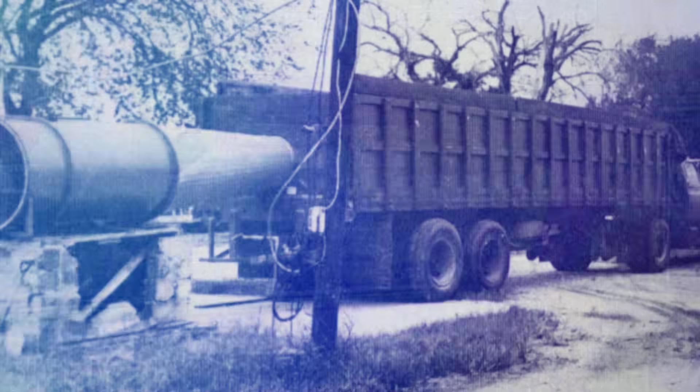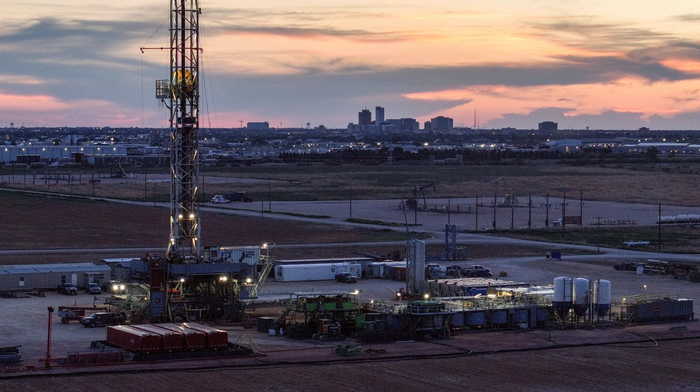You are looking at a farm that has not paid a natural gas bill since 1974, 50 years. The energy heating that farmhouse, cooking that family's food, heating their water, and running their grain dryer comes from a covered concrete tank beside the barn. Inside that tank, the manure from 40 dairy cows is producing methane gas continuously, the same methane that your natural gas company pipes to your house from a well in Texas or Oklahoma, chemically identical, produced for free by animals this farm was already feeding.

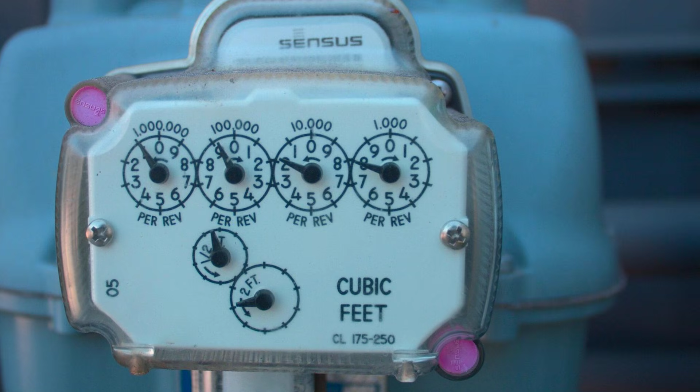The digester that makes this possible cost $1,200 to build in 1974. It has produced energy every single day since, 50 years. At current natural gas prices, the energy it has produced over that period has a retail value of approximately $187,000 against a construction cost of $1,200. Now here is what should make you set down whatever you are holding.

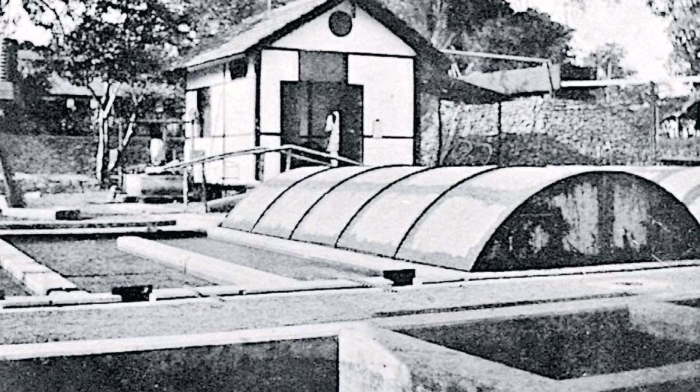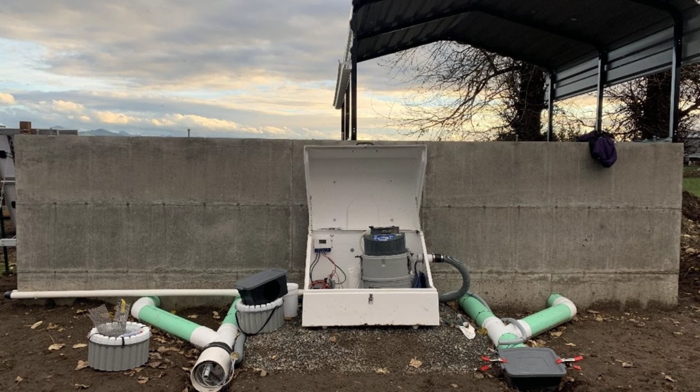In 1974, farm methane digesters were a growing movement across rural America. The energy crisis had made farmers acutely aware of their fuel dependency. University extension programs in Iowa, Wisconsin, and Minnesota were publishing construction guides. The USDA had funded research programs at 3 land-grant universities documenting digester performance across working farms. By 1980, that movement was effectively dead.

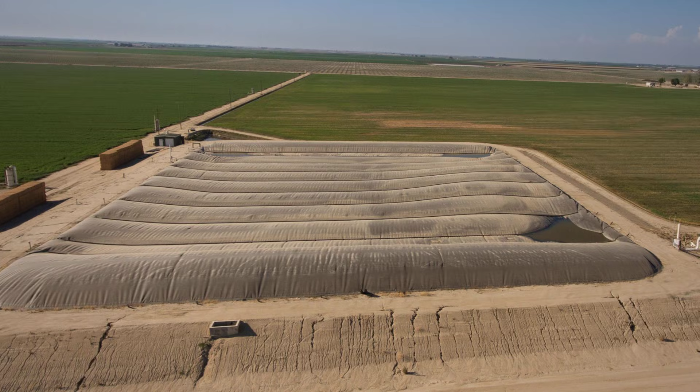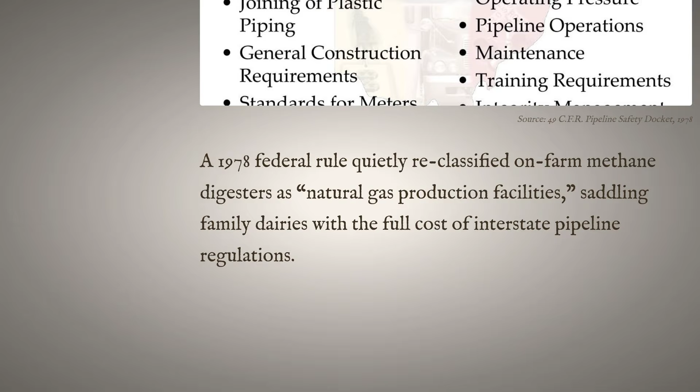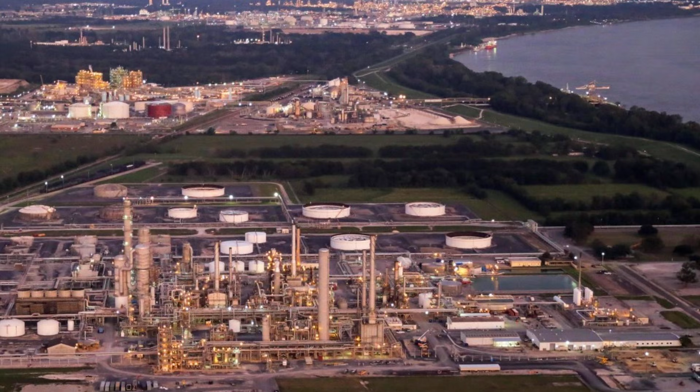Not because the digesters stopped working, but because the American Gas Association, the trade body representing every natural gas distribution company in the United States, spent $2.8 million between 1976 and 1979 on a regulatory campaign that resulted in farm methane digesters being classified as natural gas production facilities under federal pipeline safety regulations. That classification required farm digesters to meet the same construction, inspection, and operational standards as commercial natural gas production operations. Compliance cost between $40,000 and $120,000 per installation for a system that cost $1,200 to build.

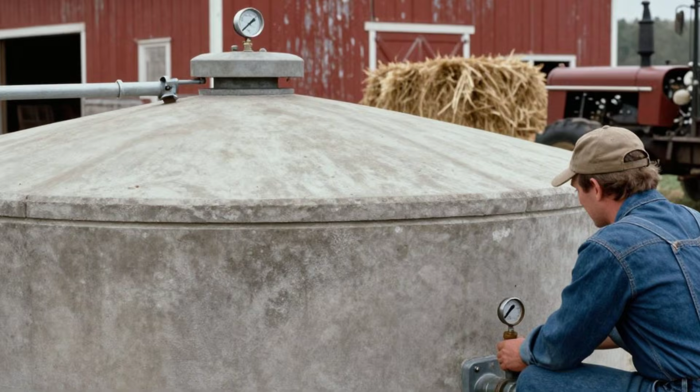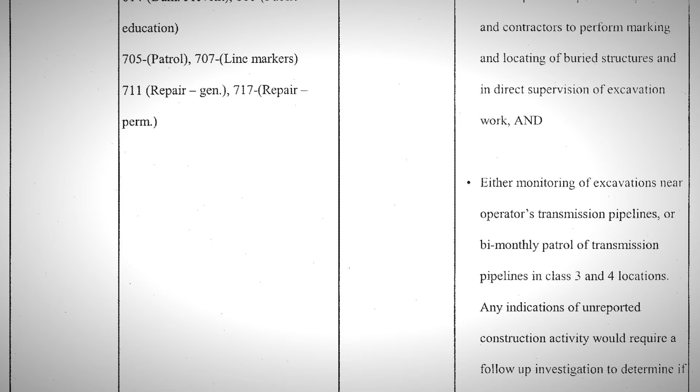The regulatory documents exist, the lobbying records exist, and the man who built his digester in 1974 before the classification took effect has been running it ever since because the regulation grandfathered existing installations. He has never stopped. Stay until the end of this video, because that man is still running his digester in Fillmore County, Minnesota. And the legal pathway that allows you to build one today without triggering the 1978 classification has been sitting in the federal code since a 1986 amendment that the American Gas Association fought and lost. By the time this is over, you will know exactly how a farm methane digester works, exactly who classified it as illegal, and exactly what it would cost to build one before next winter.

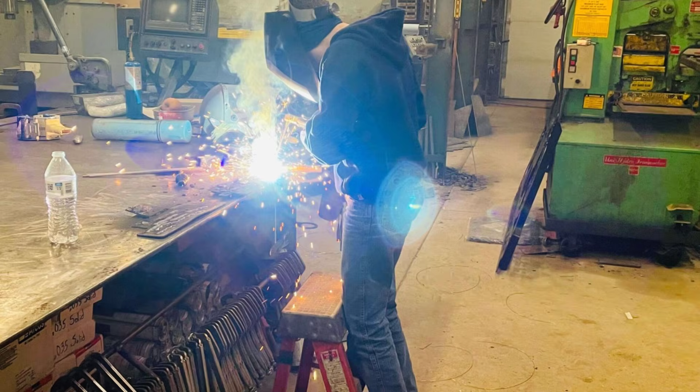I drove to Fillmore County on a Wednesday morning in January. The temperature was 4 degrees. The farmhouse I was looking for had lights on in every window. The barn beside it was lit. The water in the stock tank was not frozen. I parked and walked to the barn. The man who met me was named Harold Fensky. He was 78 years old, a dairy farmer. He was the kind of man who built things himself because he trusted his own hands more than he trusted anyone else's invoice. Harold walked me directly to the digester.

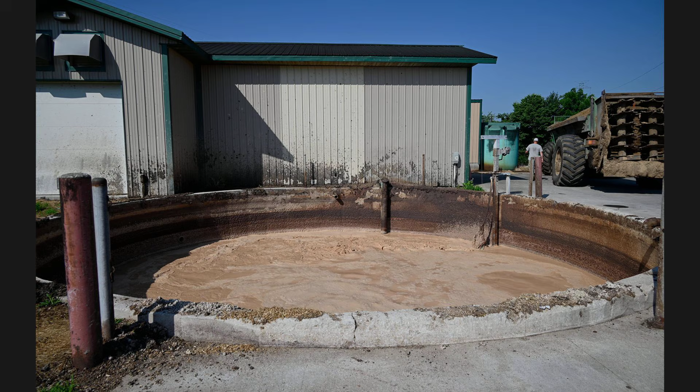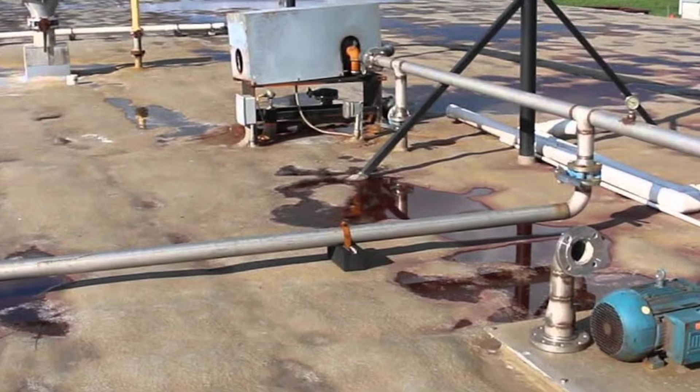It was a covered concrete tank approximately 20 feet long, 10 feet wide, and 8 feet deep, insulated with 2 inches of rigid foam on the exterior walls. A flexible gas collection cover sat on top, 2 pipes, 1 inlet from the barn manure scraper, and 1 outlet carrying gas to the farmhouse and barn. I pressed my hand against the cover. It was warm. The biological process inside was generating its own heat, even in 4-degree January air.

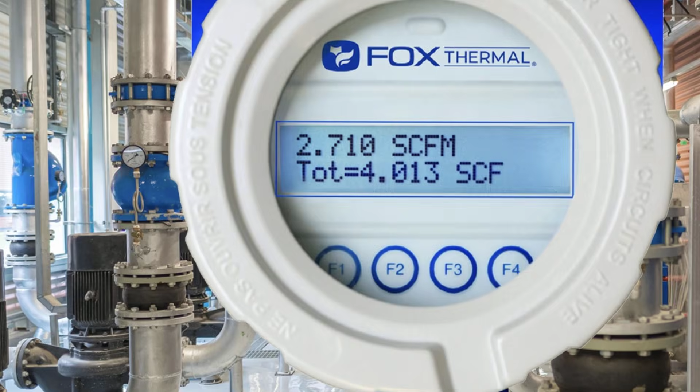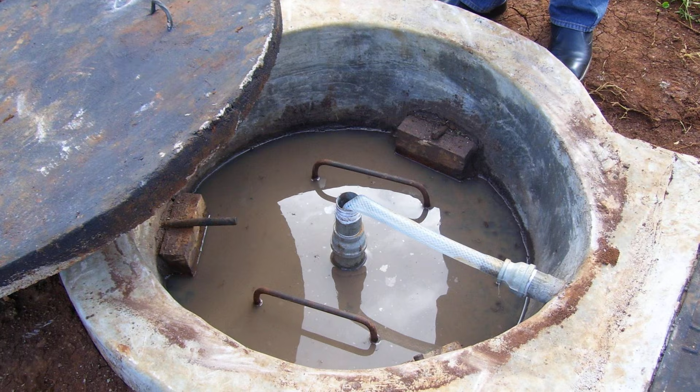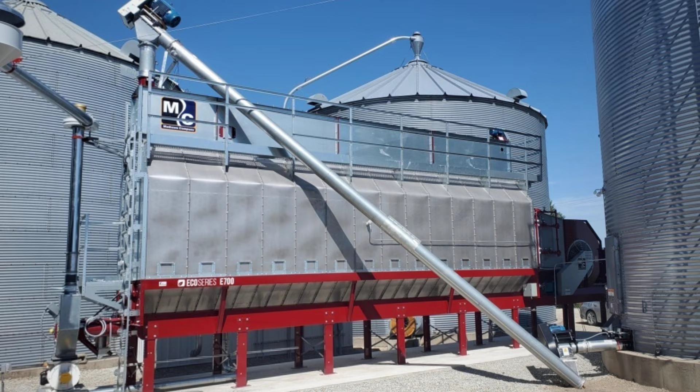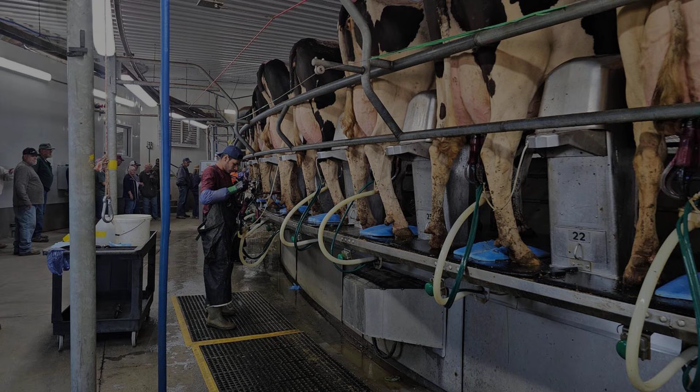Harold pointed to a pressure gauge mounted to the outlet pipe. It read 8 inches of water column, the standard low-pressure measurement for farm biogas systems. He said she is running good and that she always runs good in winter as long as he keeps the inlet warm. I asked what the digester powered. He said house heat, cook stove, water heater, grain dryer in fall, shop heater in winter. I asked what his natural gas bill was. He said, I do not have one. I asked what his electricity bill was. He said, about $40 a month, just the lights and the milking equipment. Everything that used to run on gas runs on the digester.

I stood beside that tank in 4-degree January air, and I thought about the $340 natural gas bill I had seen on a farm 2 counties over that morning. I thought, this man has not written that check in 50 years. Then I asked Harold why more farmers were not running one. He said, because they made it illegal to build. I asked who did. He said the gas company. Look it up. I looked it up.

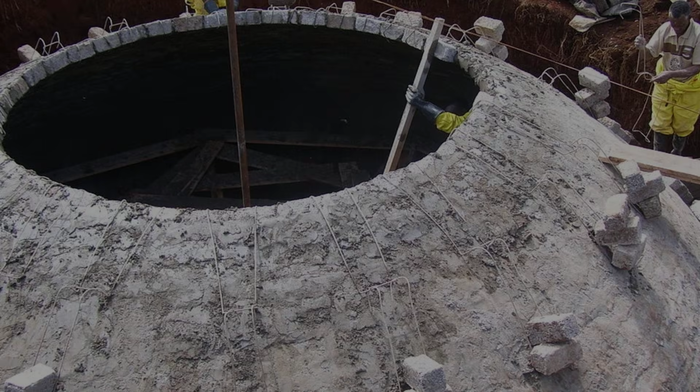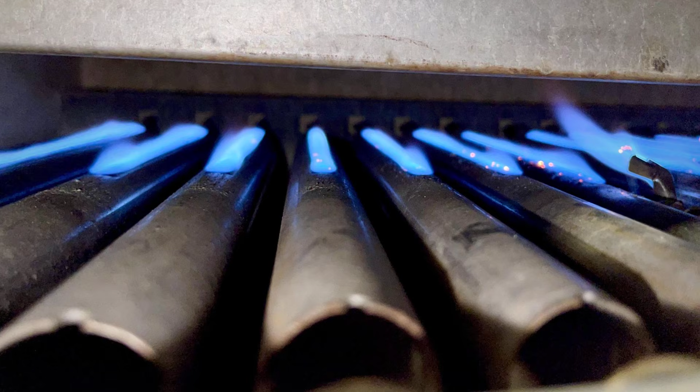Here is what is actually happening inside Harold's concrete tank. Anaerobic digestion is a biological process in which microorganisms break down organic material in the absence of oxygen. The primary output of that breakdown is biogas, a mixture of 60% methane and 40% carbon dioxide with trace amounts of other gases. The methane component is chemically identical to the natural gas delivered by pipeline to your home. It burns at the same temperature. It produces the same heat output. It runs the same appliances. The feedstock, dairy cow manure, is the most productive biogas substrate in common agricultural use.

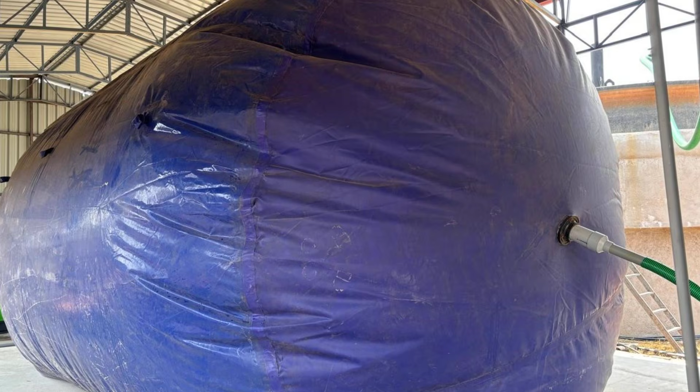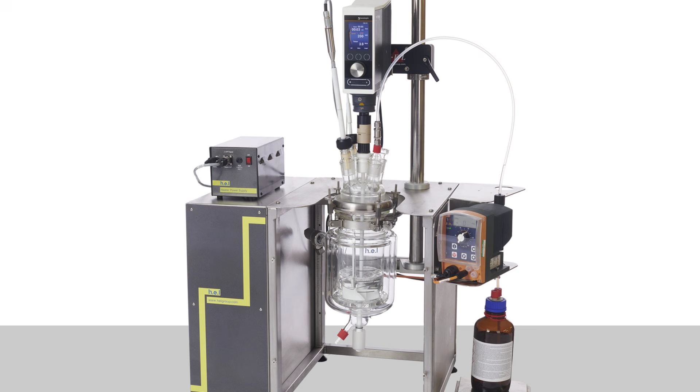A single dairy cow produces approximately 120 pounds of manure per day. That manure contains sufficient organic material to produce between 28 and 40 cubic feet of biogas daily. Harold runs 40 cows. His daily biogas production is between 1,120 and 1,600 cubic feet. The energy content of biogas at 60% methane is approximately 600 BTU per cubic foot. Harold's daily energy production is between 672,000 and 960,000 BTU.

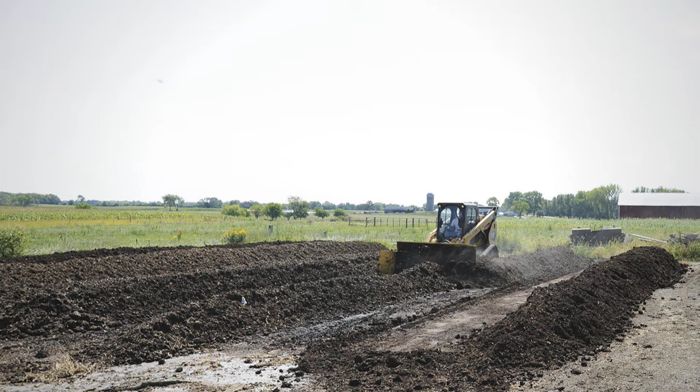The average American farmhouse requires approximately 400,000 to 600,000 BTU per day for heating, cooking, and hot water in a cold climate winter month. Harold's 40 cows produce more energy than his farm and house require every day from waste that was already being produced.

The Iowa State University Extension published a farm biogas feasibility study in 1975, the year after Harold built his digester, documenting the energy production potential of dairy, swine, and poultry operations across the Midwest. Their findings confirmed that a dairy operation of 30 or more cows could produce sufficient biogas to meet all thermal energy needs of the farm and residents.

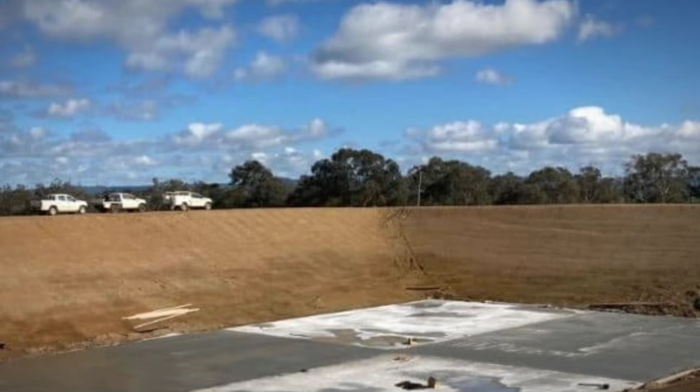30 cows. The study documented construction costs for a basic covered lagoon digester at between $800 and $1,500 in 1975 dollars. That study was distributed to 4,200 farmers through the Iowa State Extension Network in 1975. It was withdrawn from active distribution in 1979. The same year, the American Gas Association's regulatory campaign reached its conclusion.

The farm methane digester did not disappear from American agriculture because it stopped producing energy. It disappeared because the American Gas Association, AGA, executed a regulatory campaign so precisely targeted that it made the construction of a new farm digester economically impossible without ever passing a single law through Congress. The campaign is documented in the Federal Register.

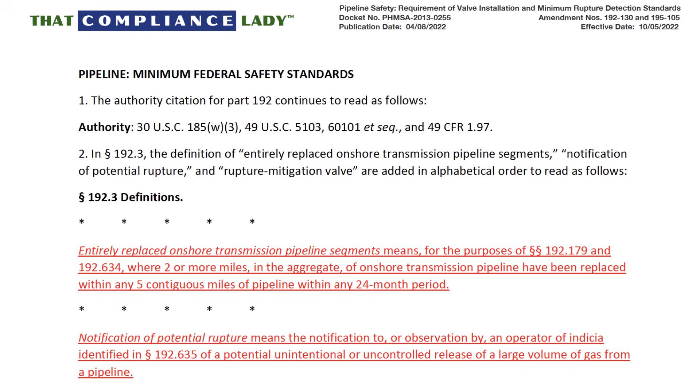In 1976, the American Gas Association, AGA, whose members included Columbia Gas, Consolidated Natural Gas, Pacific Gas and Electric, and Southern Natural Gas, filed a formal petition with the Department of Transportation's Office of Pipeline Safety, requesting that farm biogas production systems be classified as natural gas facilities under 49 CFR Part 192, the Federal Pipeline Safety Regulations.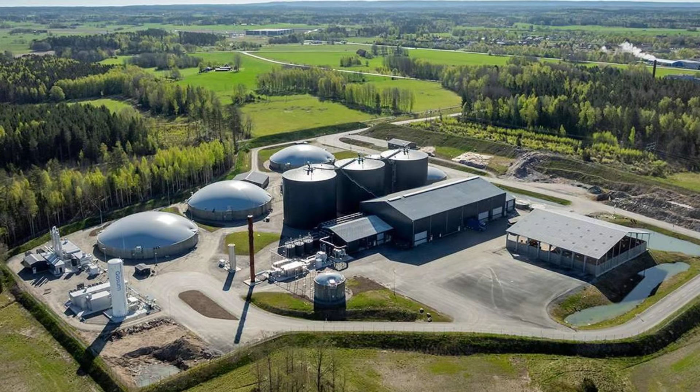The petition argued that farm biogas systems produced a gas chemically similar to natural gas and therefore posed similar safety risks, requiring equivalent regulatory oversight. That safety argument was not entirely without merit in the context of large commercial biogas operations. It had no merit whatsoever in the context of a covered concrete tank on a dairy farm producing low-pressure gas for on-site use. The AGA knew this.

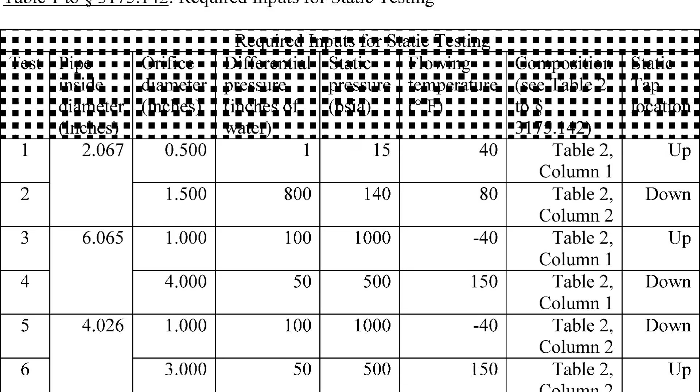Their own internal documents, obtained through a 1994 FOIA request filed by the National Center for Appropriate Technology, show that the AGA Regulatory Affairs Committee identified farm biogas classification as a market protection measure rather than a safety initiative. A 1976 AGA internal memo, document reference AGARA 1976-047, stated explicitly that the classification petition was intended to create a compliance cost barrier sufficient to prevent the expansion of farm biogas adoption in the residential heating market. The residential heating market, the market the AGA members depended on for their revenue.

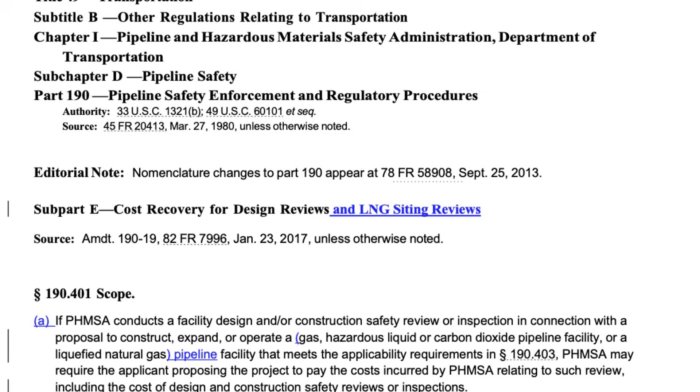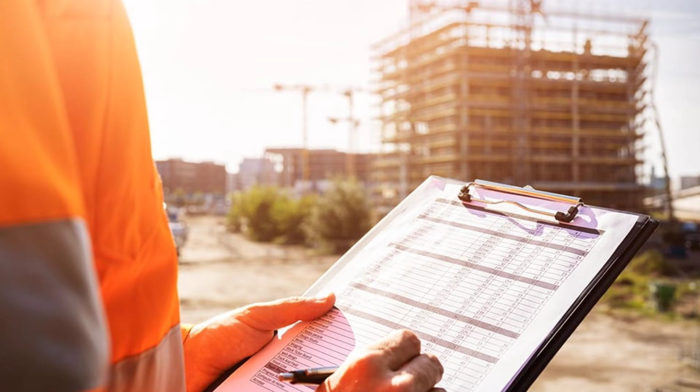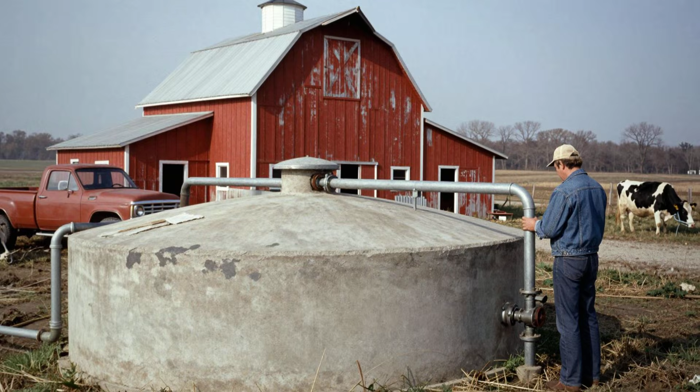The petition was granted in 1978. Farm biogas production systems were classified as natural gas facilities under 49 CFR Part 192. The compliance requirements the classification imposed: engineering certification, pressure testing, inspection protocols, and operational documentation, cost between $40,000 and $120,000 per installation to implement. For a system that cost $1,200 to build. The Iowa State Extension study was withdrawn from distribution. The USDA farm biogas research programs at 3 land-grant universities had their funding eliminated in the 1979 federal budget.

The AGA spent $2.8 million on the regulatory campaign between 1976 and 1979. Their combined member revenue from residential natural gas sales at the time exceeded $14 billion annually. Every farm that built a digester was a farm that stopped buying natural gas. The AGA internal documents are available through the National Center for Appropriate Technology in Butte, Montana. The Federal Register petition and classification ruling are publicly available through the Government Publishing Office. They are a matter of record.

Harold Fenske built his digester in the summer of 1974. He was 28 years old. He had read the Iowa State Extension Bulletin. He had attended a workshop at the University of Minnesota. He had spent 3 weekends pouring concrete and laying pipe. He fired it up in September of 1974. By October, his cook stove was running on cow manure. He told me that he wanted you to hear exactly how he said this.

I turned that burner on for the first time, and I stood there, and I thought, I am cooking breakfast on gas that my cows made. And I thought, why is everyone not doing this? And I thought they will be. Once people understand what this is, everyone will be doing this. He paused. Then he said, and then 1978 happened.

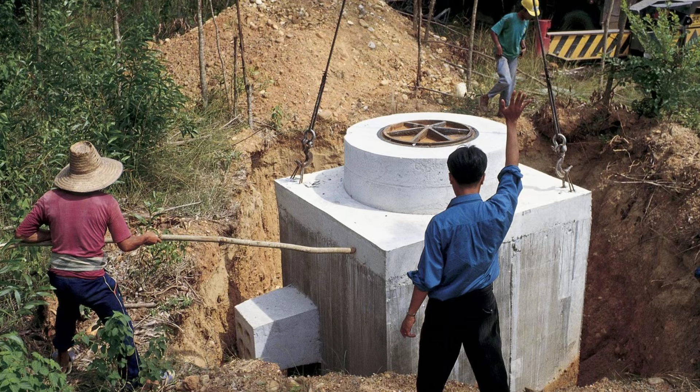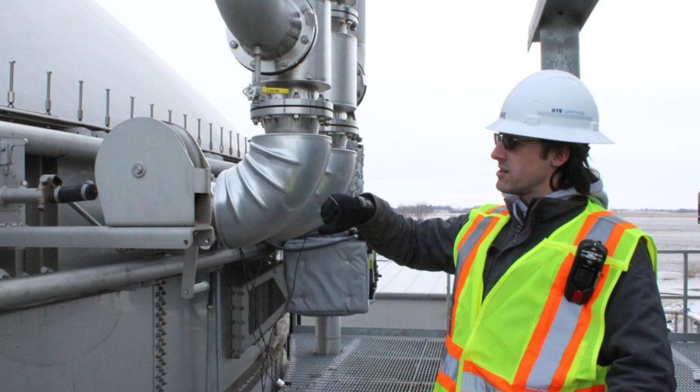I asked him what he remembered about 1978. I remember a neighbor who had been planning to build one. He had his concrete poured and his pipe ordered. Then he got a letter from the county saying the classification had changed, that what he was building was now a regulated natural gas facility, that he needed engineering certification and inspection and compliance documentation. He looked at the cost and he stopped. He filled in the hole and he went back to paying the gas company.

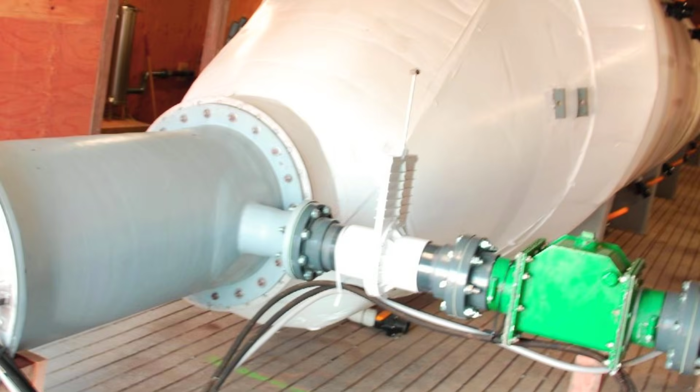I asked Harold how he felt about the fact that his installation was grandfathered. "I felt lucky, and then I felt angry, because luck should not be the difference between a man having free energy and a man paying $340 a month. The difference should be whether the system works, and it works. It has always worked."

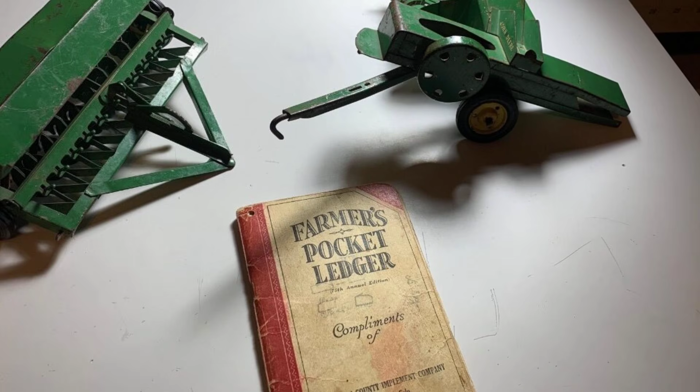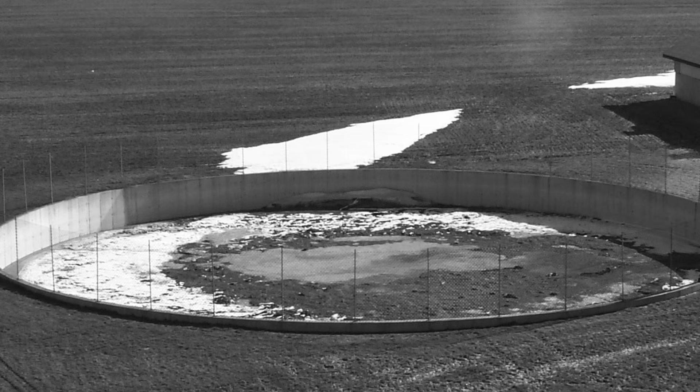I asked him what his digester had saved him over 50 years. He pulled a small notebook from his shirt pocket. He had been tracking it. "At current gas prices, I calculate I have not paid for about $187,000 worth of energy since 1974. That is what the digester has produced, against $1,200 to build it." He put the notebook back in his pocket.

"The gas company got $2.8 million worth of lobbying. I got $187,000 worth of free energy. I think I came out ahead."

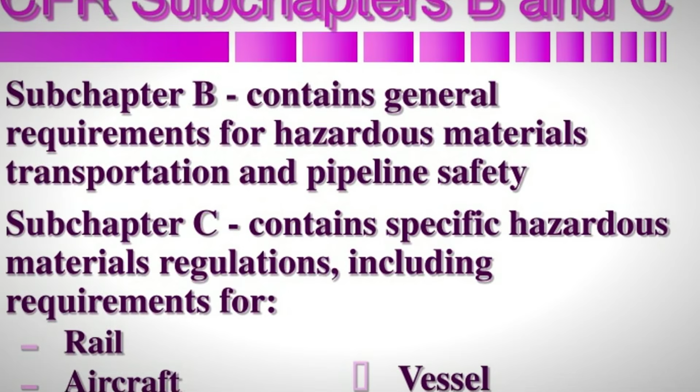Here is the legal framework and the practical pathway. The 1978 classification that imposed commercial natural gas facility requirements on farm digesters was amended in 1986 following a sustained campaign by the National Center for Appropriate Technology and the American Biogas Council. The 1986 amendment, codified in 49 CFR Part 192.1, subsection B, paragraph 4, exempts farm biogas systems that meet 3 specific criteria from commercial natural gas facility classification.

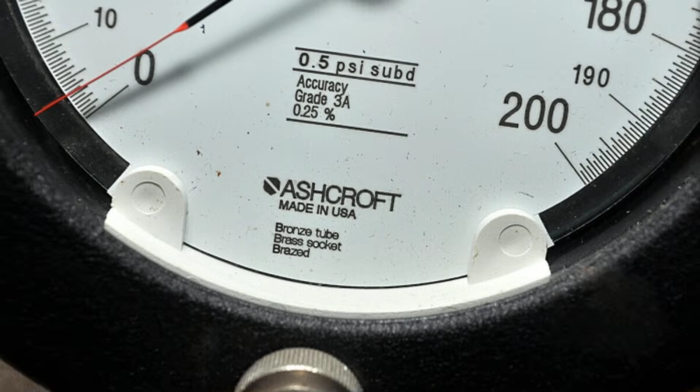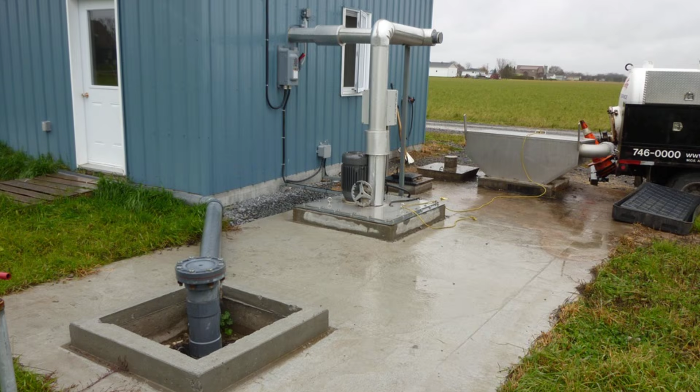The system must serve only the farm property where it is located. It must operate at pressures below 0.5 pounds per square inch at the point of use. It must not connect to any interstate or intrastate natural gas pipeline. A farm digester producing gas for on-site use at low pressure meets all 3 criteria. It is exempt from the 1978 classification. It is legal to build in all 50 states under the 1986 amendment.

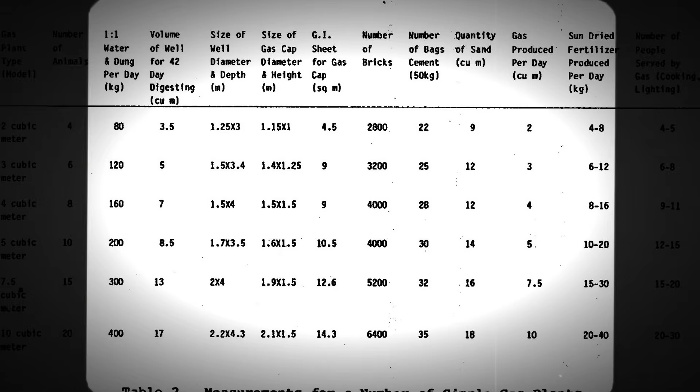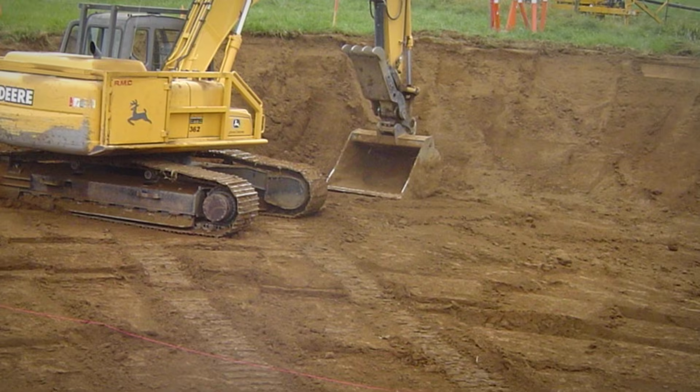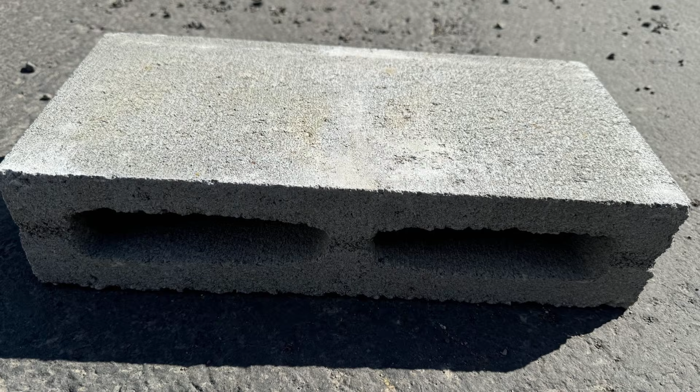Harold's construction method, refined over 50 years of operation, uses a covered concrete tank digester that is appropriate for dairy operations of 20 to 80 cows. Excavation for a 20 by 10 by 8 foot tank takes 1 day with a backhoe, with rental costing $400 to $600. Concrete block walls and a poured concrete floor cost $600 to $800 in materials. Rigid foam insulation on exterior walls costs $120.

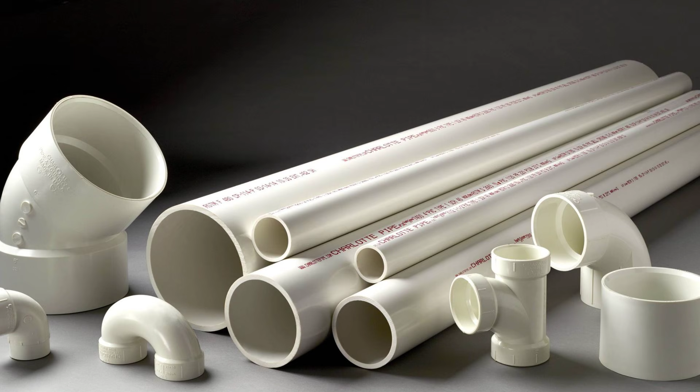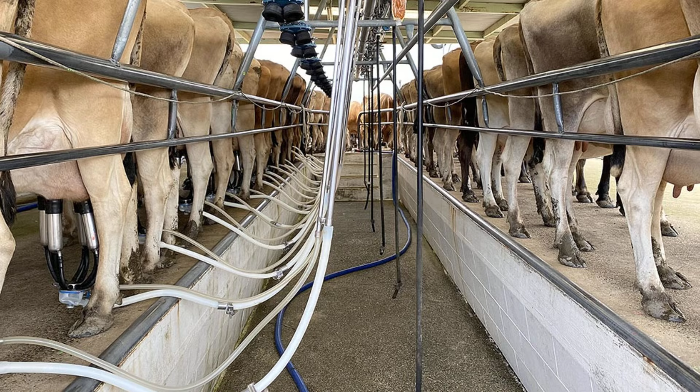A flexible gas collection cover, reinforced polyethylene sealed at the tank edges, costs $180 from agricultural suppliers. Inlet and outlet piping, standard 4-inch PVC, costs $60. A low-pressure gas regulator and distribution piping to the house costs $140. Total material cost is $1,500 to $1,900. Daily gas production from 40 cows is sufficient for all thermal energy needs of a standard farmhouse and barn in a cold climate. The annual natural gas bill after installation is $0.

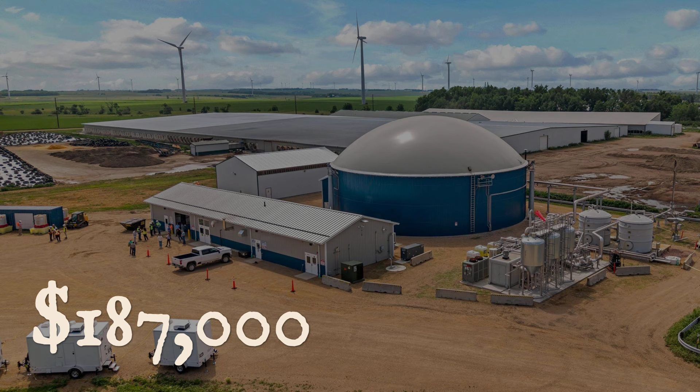Here is what we know. A farm methane digester built for $1,200 in 1974 has produced $187,000 worth of energy over 50 years on Harold Fenskey's dairy farm in Fillmore County, Minnesota. The Iowa State University Extension documented sufficient biogas production for complete farm thermal energy independence from herds of 30 or more dairy cows in 1975. The 1986 amendment to 49 CFR Part 192 exempts on-farm low-pressure biogas systems from commercial natural gas facility classification.

The American Gas Association spent $2.8 million between 1976 and 1979 lobbying for the classification that made building one of these systems economically impossible for the decade between 1978 and 1986. Their own internal document, AGA RA 1976-047, described the classification petition as a market protection measure, not a safety initiative. A market protection measure. The document is available through the National Center for Appropriate Technology in Butte, Montana.

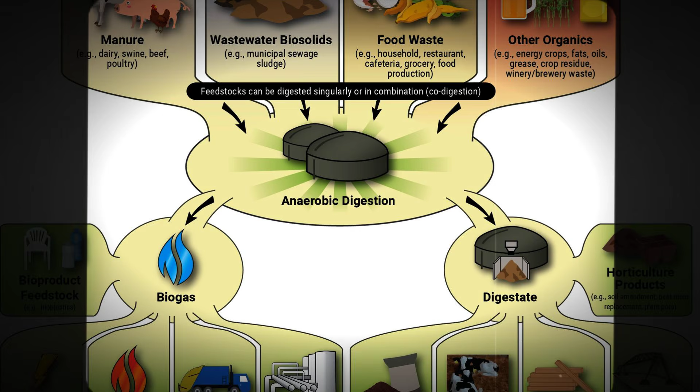If you run 30 or more dairy cows, you are producing enough manure every day to heat your house, cook your food, heat your water, and run your grain dryer for free every day for the next 50 years.